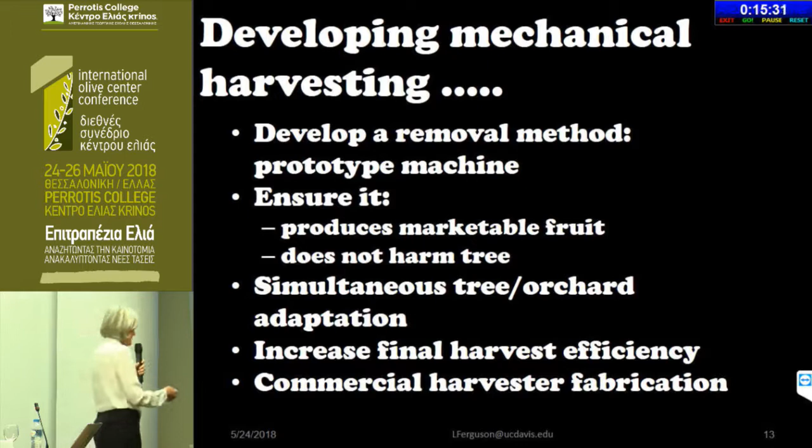Okay, so let's start with the harvester. There are basically, at this point in time, for tree fruits and tree nuts, two removal methods. There are the trunk shaking harvesters, adapted from prunes and pistachios, where basically the force is delivered to the trunk of the tree. And then there are the canopy contact harvesters, where the force is delivered directly into the canopy, up where the fruit is. And they're generally adapted from grapes.

Okay, we're going to start with trunk shaking harvesters. This is an adapted pistachio harvester. It's a two-part machine. It costs roughly $750,000 to $1 million for one of these sets of what we call doubles. Basically, it's one wing on one side, one wing on the other. The shaking mechanism is down in here.

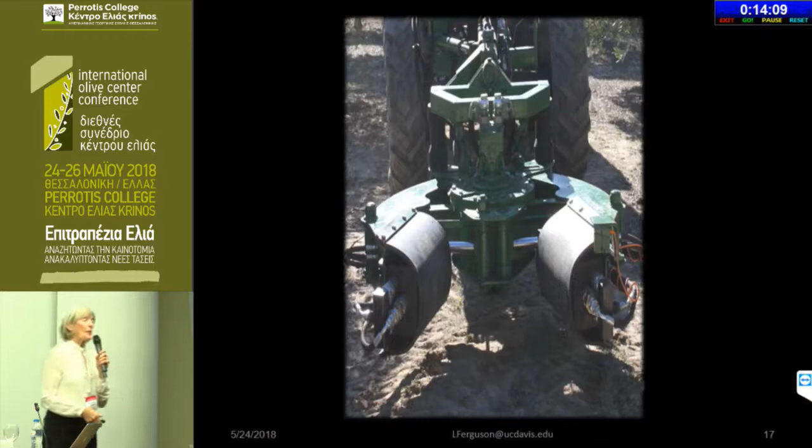The olives are shaken down onto this deck, delivered up, and into a bin. Actually, the bin is in the front. This is a spare bin. This is basically the working part of the machine.

It's these two pads that clamp onto the tree trunk. They're mounted inside these two wings, like this, that then close around the tree and also close the alleyway on either side of the tree so olives don't drop on the ground.

And then this is what it looks like from the back. The olives basically come down here, trail up here, go into a bin up there.

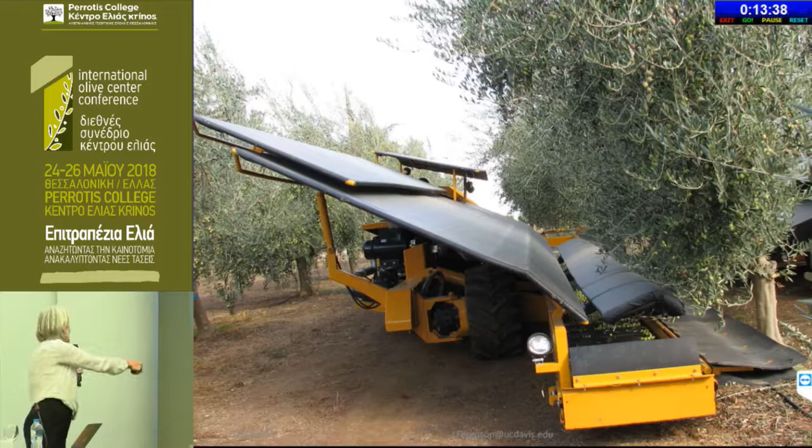Trunk shaking harvesters deliver force very, very well vertically, less well horizontally, and very poorly in a downward direction. So the biggest problem with trunk shaking harvesters is the closer the fruit is to the origin of the shake, the better the machine functions. But as the force travels here, here, and here, it decreases very much.

The other thing about this is you need a tree that doesn't have a very thick canopy, because the volume of the foliage will lessen the force of the harvester. It's this kind of harvesting that would benefit most from an abscission compound, from something that decreases the fruit removal force.

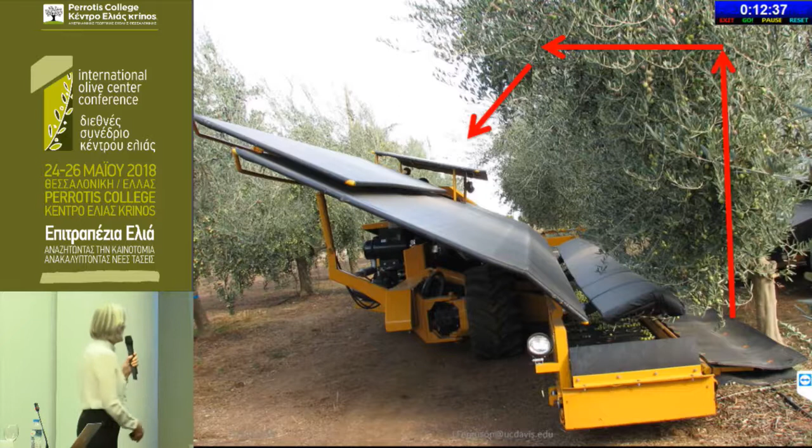It gave me all my stuff right away. I don't want that.

For this kind of harvester, you need a short, upright tree with very stiff branches. This tree has been modified with mechanical pruning to have major uprights. Modified with mechanical pruning, we basically hedged the sides of the tree, we topped the tree, and we do that, but we top it, or we hedge it every other row, every other year, and we top every year. We found that we have to top every year to control the height, and we have to have a clear trunk down here to get the catch frame under the tree.

We basically used adapted pistachio and prune harvesters, and this is what it would look like in operation. These are the kind of parameters after several years of trials that we got out of the machine.

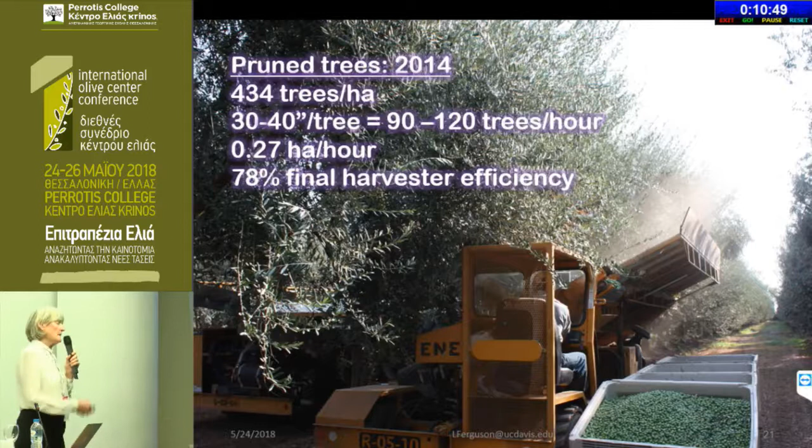We used it in a moderate density, 180 trees to the acre, or 434 trees to the hectare. When the operator was trained, he could do a tree about every 30 to 40 seconds, about 90 to 120 trees to the hour. That meant he could do about a quarter of a hectare in an hour, and we got 78% final harvester efficiency. So in a 5 ton to the acre crop, or ton to the hectare crop, we were taking off 4 tons. It was worth it at that rate for the grower to send in hand gleaners afterwards.

This is how they're loaded down. They come off, down over here, and into this bin.

However, we still don't even want to have hands in the orchard. A machine like this can take two men. You generally have to have one man driving it, another man driving the other side, it takes three men, and one person walking behind to pull these bins off when they're full and pull the next bin into position.

We found we could increase the efficiency by adapting the machine in this fashion. You see this area up here?

First I'll show you the quality we got. Basically, the quality of the olives at the receiving station, that's where we get the quality of our olives. They were 95% acceptable for canning. Of course, you can see marks on them, things like this. But here's hand-harvested olives—they have marks on them, too.

One of the ways they tried to improve this machine: both the researchers in Israel and the researchers in Spain, and ourselves, found that if you can put an upper deck on the machine, up on the top—this section right here—we added a deck.

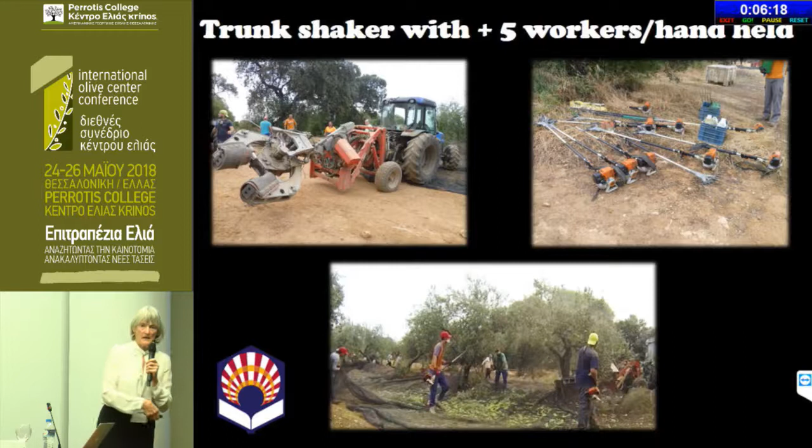The biggest problem I see with this is collection of the olives—not to mention the guys are stomping all over the olives the whole time down here. So even though he achieved a field capacity, just like ourselves, he's getting about 2 hectares per hour.

They're doing 2 shakes on the tree, 4 to 6 seconds. These are very strong shakers, these almond shakers, at a frequency just about what we use, 27 hertz. He got a fruit removal of over 95%. But my attitude is, when you do mechanical harvesting, you want continuous motion—you want to be able to move down that row.

So for trunk shaking harvesters, here's what we've come up with thus far: it's a solution for about 15 years, and you need about 70 to 100 centimeters of trunk.

That's Leandro Ravetti. Basically, you're going to work in the range of 23 to 27 hertz as your frequency. Earlier versions, we got 77% efficiency. But like Sergio Castro Garcia, once we started to put people raking the canopy at the same time we were shaking the trunks, we could get that up to 90%—with him, 95%.

The fruit quality is excellent. It's fine for harvesting. However, there is trunk damage. And if you try to decrease the trunk damage with additional padding, it decreases the efficacy of the harvester. So bottom line, trunk shaking is not a long-term solution. That was the conclusion on trunk shaking harvesters.

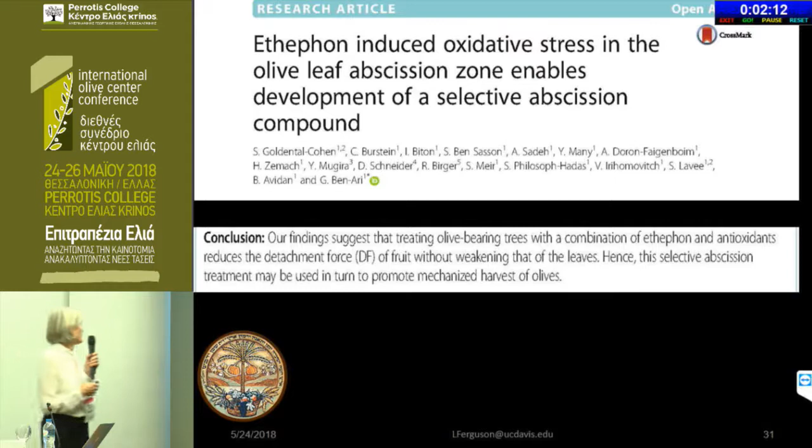We tried this last year. It didn't work, but we're going to try it again. So at this point in time, we still cannot effectively use Ethephon. We're still getting unacceptable leaf loss with fruit removal force. So as far as I'm concerned, at this point in time, we have no effective abscission agents.

Okay, now we're going to talk about canopy contact harvesters, basically adapted from grapes, though I am going to show you a harvester that's a little bit different than the grape harvester you're going to see at the end.

One of the big mistakes everybody makes when they start developing mechanical harvesting is they develop the machine for the tree they have. This was the first harvester I worked with. It's embarrassing even to look at the thing. But it had two sides like this. We worked with this for four years. We even were very proud of ourselves.

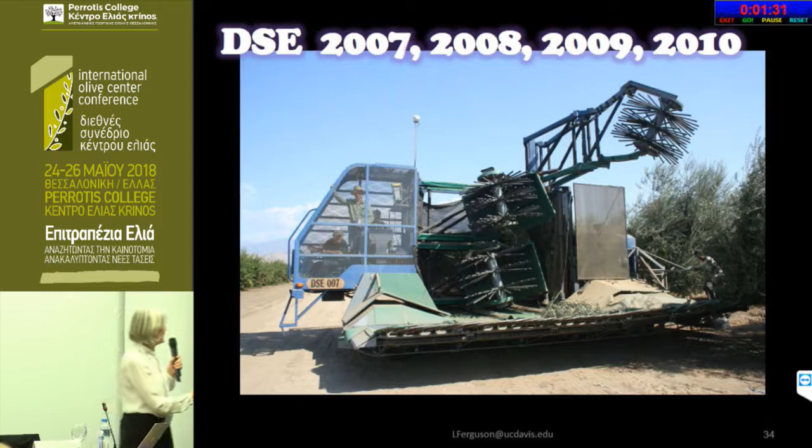We put a little GPS up here and we put a little weight down here so that we could get the weight of each tree as we went down the row. And basically what this machine did was mangle trees and break them up.

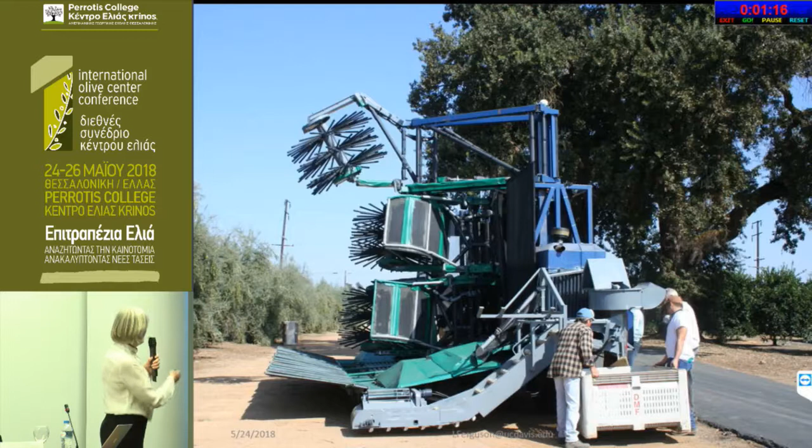But what we finally did was the value of this machine for us was we used it to show where these heads and these surfaces were producing damage. Because basically when we first started, this is what hand-harvested fruit looked like. This is what mechanically harvested fruit looked like. And even though in California most of our fruit is processed into black ripe, we can hide some bruises. Some of them are still too deep to have a processed olive.

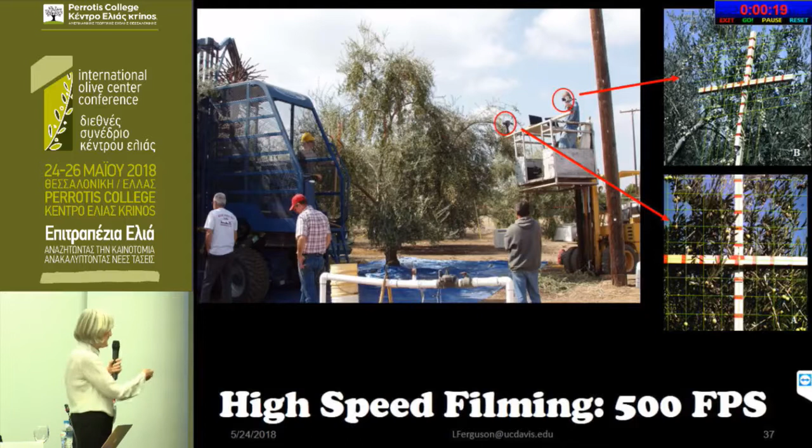So basically what we did was we did a lot of very high-speed films to demonstrate where the olives were going, this was a camera, did a lot of high-speed films, 500 frames per second, to demonstrate where the olives were going in the tree, what they were hitting, and then we collect them at different points in the harvest process. So we did a lot of very short little videos following individual olives to see if they were hitting the rods, if they were hitting the branches, or if they were hitting parts of the machine.

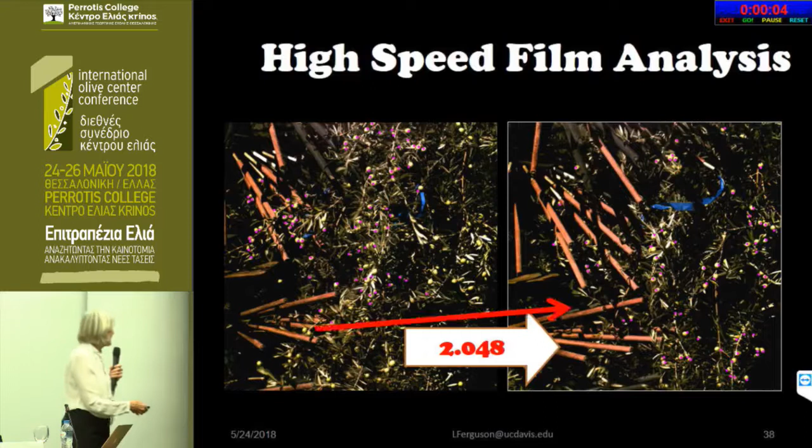And basically what we found out was these rods were producing a good 20% of the damage, and we solved it by padding it with a different kind of padding. It was called Shore 20A. It's padding that has a lot of resilience, that absorbs the blow instead of batting it. It just lets the olive sink into the rod.

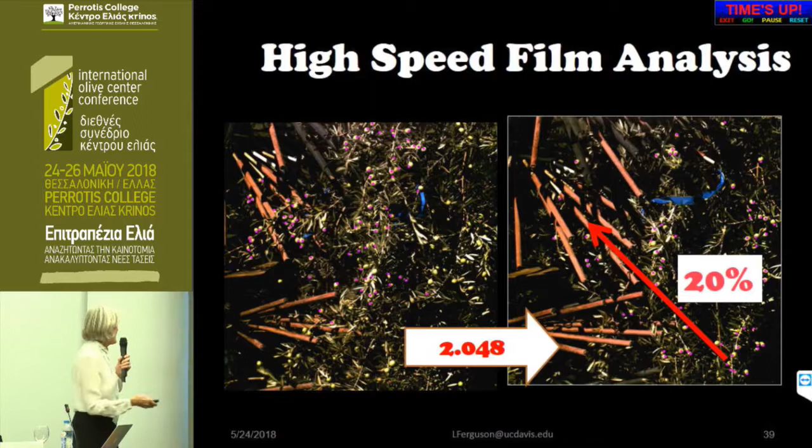Okay, then what we did with all our olives was we had them — sadly enough, we only have two major commercial processors in California, I know that's hard to believe in Greece and Spain — but we have Bell Carter and we have Musco.

This was the University of California Postharvest lab. We would take our olives after harvest and divide the ones from each tree. We'd send one sample to one processor, one to the other processor, and one to University of California at Davis to be graded, and they'd tell us what the olives were worth.

We would also have the olives tested by a trained sensory panel, same thing as an olive oil panel. They had all their different samples of olives, a grading sheet with good and bad qualities, crackers, and water to clear their palate. This is just like a wine panel or an olive oil tasting panel. They tell you what's good, what's bad, what they like, what they don't like, and the characteristics.

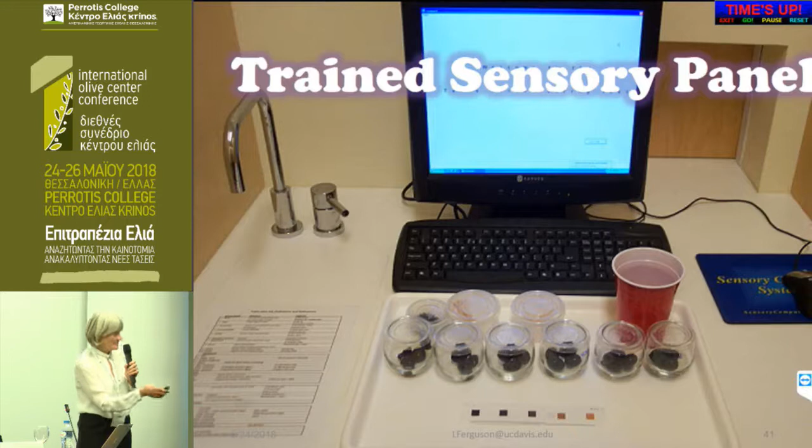Then we have a big picnic day every year at Davis, and we had consumer preference panels. We brought people in, gave them the mechanically harvested and the hand harvested olives, and said, tell us what you like and what you don't like. This was a way for consumers to say what they liked about our mechanically versus hand harvested olives.

What we learned was, one, our consumers could not tell hand-harvested olives from machine-harvested olives. They could not tell processor B from processor A, but they sure could tell olives that were processed as soon as they were harvested compared to olives that had been stored in brine. But the real lesson is they couldn't tell the difference between hand or mechanical harvested.

So we have a machine here, and this was true for both the trunk shaking and the canopy contact shaking. We had a machine that the consumers could not tell the difference in the olives.

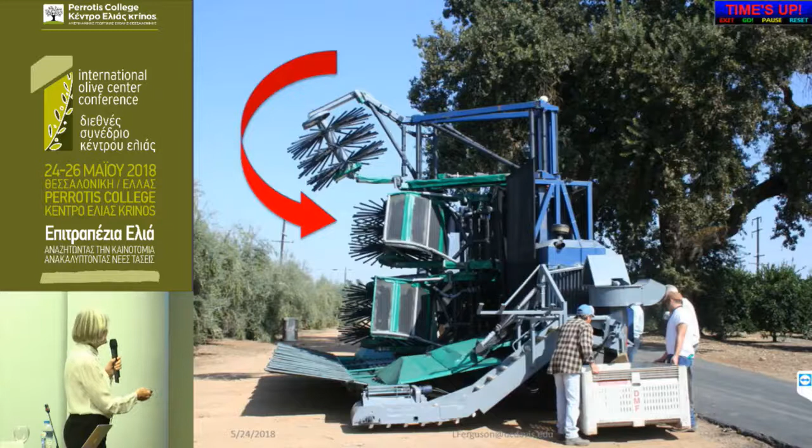So then what we did with this machine was realize it was too big. We took off the head and adapted it down to a smaller machine. In California, I only have a few growers with very large acreage, and they are not going to buy a million dollar machine. So we took this head off and mounted it to a rented bobcat. This means the grower could have his own little machine and rent a bobcat for the power takeoff, which means the machine would be in good shape because it wasn't sitting in his barn all year.

We found we could fabricate this head for about $50,000. So a small grower could have one or two — it's better to have two because you want compression — and a big grower could have ten. But the major thing is it didn't cost a million dollars. Now remember, this is still a prototype; there's only one of these that exists.

The other thing we found out, working with this technology in a different kind of machine called the Ag-Rite Olivia, was that compression really matters. You get better removal if you can compress the canopy. So what we came up with is a machine like this should be operated as a set of two — you need one on each side of the row, going down the row simultaneously. At this point in time, we have a canopy contact harvester that gave us about 80 to 90% removal.

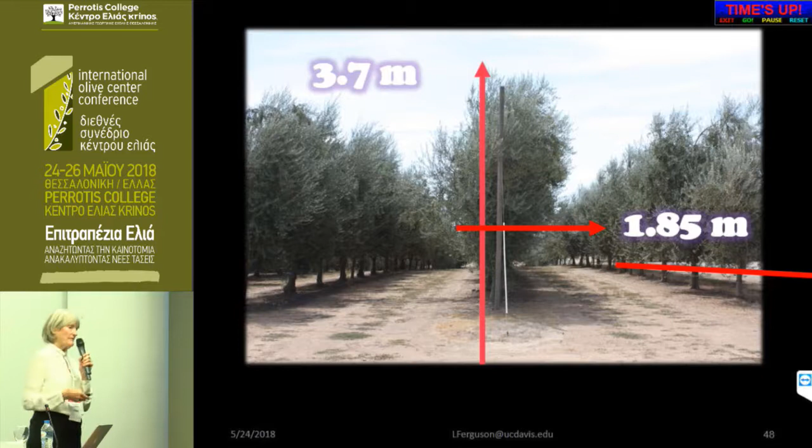This is the kind of tree it really needs. I used to think 3.7 meters, now I think 3 meters. We want a canopy that's no more than 2 meters wide, and brought up from the ground about 1 meter for the catch frame when we finally develop one. These are about 490 trees to the hectare, moderate density trees. We try to train the trees within the row like this — we call it palmate — but increasingly now we're just letting them go central leader, because we're finding out they naturally form this palmate shape.

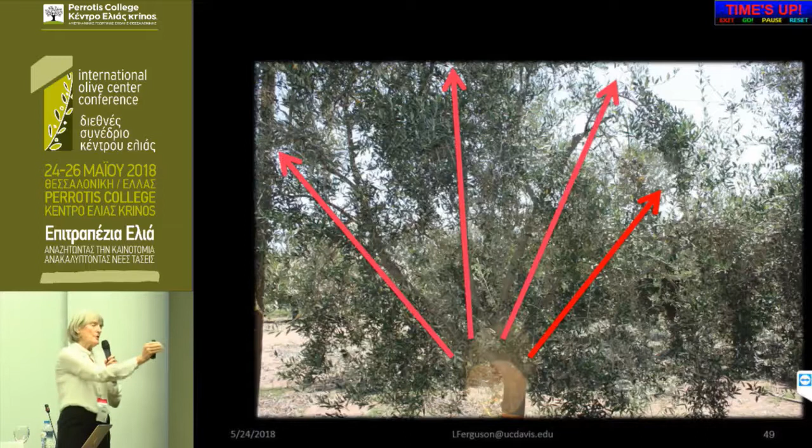What you need for a machine like this is a fruiting waterfall. You need the fruit to be all in the same plane and falling off the sides like this. You need the fruit to be in the same plane so that when the harvester goes down the row, you don't have to move the head in and out. And the way you're going to get that is with mechanical pruning. You're going to hedge the middles of the rows every other year, and we found it's best just to top the rows every year. They're finding now with super high density in California that you need to top every year to control the height. Okay?

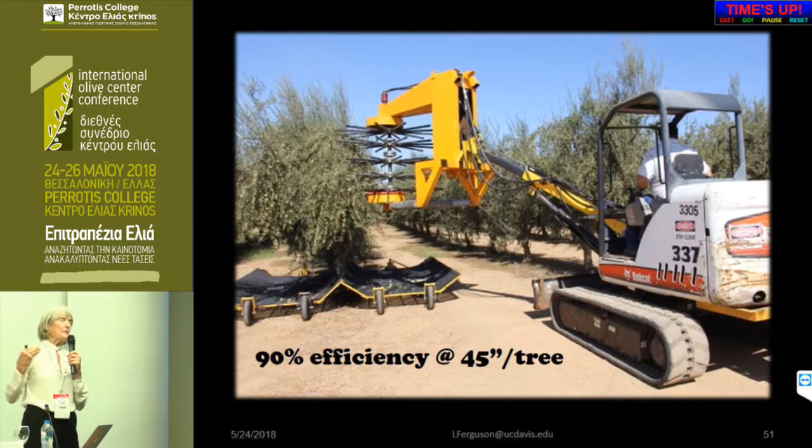So at this point in time, this little prototype gives us about 90% efficiency at about 45 seconds to the tree. It moves quite slowly. That's about 0.15 hectare per hour.

Okay, now I'm just going to tell you what's going on a couple other places. This is the program in Sevilla. They have started to do super high density. They are adapting the grape harvesters. These harvesters have a different technology. This is not the same row of tines inside the machine. This is bow rod technology. The bow rods are very taut rods that vibrate against the tree like this.

We have just found in California, particularly with Koroneiki and Arbosana, two oil varieties, there is a new fungal disease called Neofabraea. Did I say that right, Dan? Neofabraea, yeah. There's a new disease that is very much exacerbated by this kind of harvesting technology.

I am not fond of over-the-row harvesters. They're too big, they're too expensive, they limit the size of your trees. When I can make a little machine with two little heads for less than $100,000, I'm not willing to spend close to $500,000 for this machine, and I have seen too much branch damage from these bow rods.

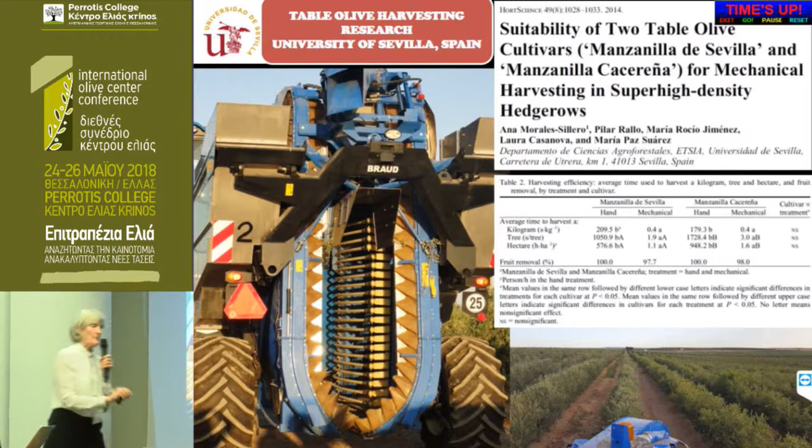However, with Manzanilla and with table olive cultivars, they are getting good removal efficiencies. The only thing I'd say about this data is that she said the hand harvesters get 100%. I have never seen a hand harvesting crew get 100%. Okay? They are also working at Sevilla with the different kinds of bruises that you see both on the surface and deep in the fruit. So at Sevilla, they have a very nice program going determining how bruising is produced in fruit and how they can perhaps ameliorate it with immediate post-harvest treatments.

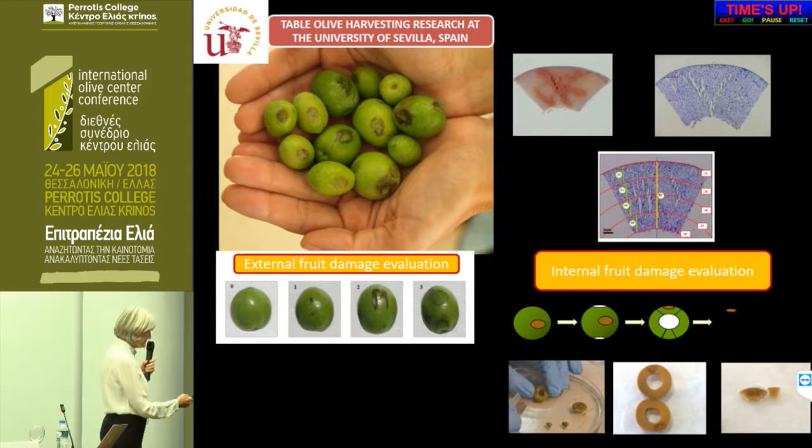And finally, at Sevilla, they do have a breeding program going, just as the breeding program that produced the olive oil cultivars that are faster growing, crop up sooner, and have more highly dissected branches. They have a breeding program started in 2003 for mechanically harvested trees. It is traditional breeding, but they're also going to incorporate molecular techniques. And that is the review of mechanical harvesting globally with all my cooperators.